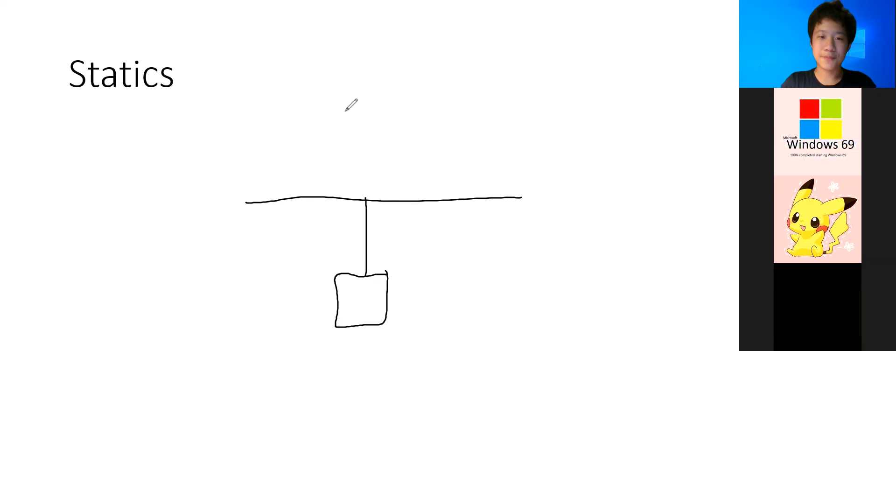Since the definition of this is so simple, and it seems like we've done a lot of problems similar to this before, it's going to be pretty easy for you, I think, and we're just going to go more in depth about it. Okay, so statics is basically the physics behind anything that's not moving, stable.

And in statics we have something called static equilibrium. Static equilibrium is basically a fancier word to describe an object at rest. So if an object isn't moving, we would say that this object is in static equilibrium. Things that are in static equilibrium are things that aren't moving.

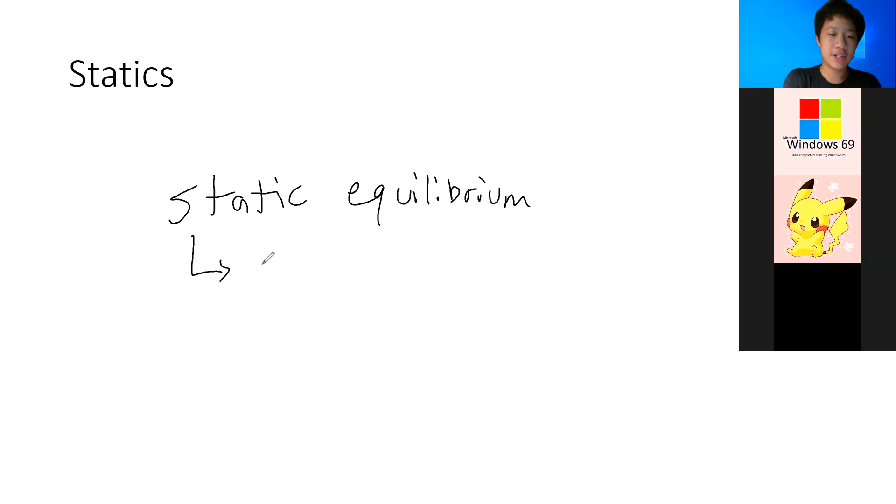So what qualifies something as being in static equilibrium? There are actually two qualifications that are needed. The first qualification is no net force acting on the object. And the second qualification is no net torque.

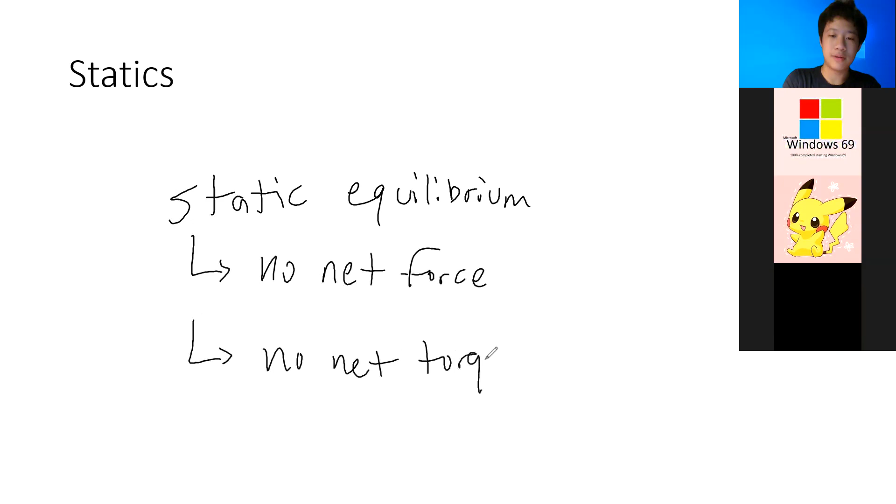Okay, so these are pretty intuitive, right? If there was a net force on the object, then it would start to move and flip over, and it wouldn't be in static equilibrium anymore. That's why there cannot be any net force. Also there can't be any net torque on the object, because then the object would start spinning or rotating, and then it wouldn't be in static equilibrium either.

So these are the two things we need for static equilibrium: first, no net force is allowed, and no net torque is allowed.

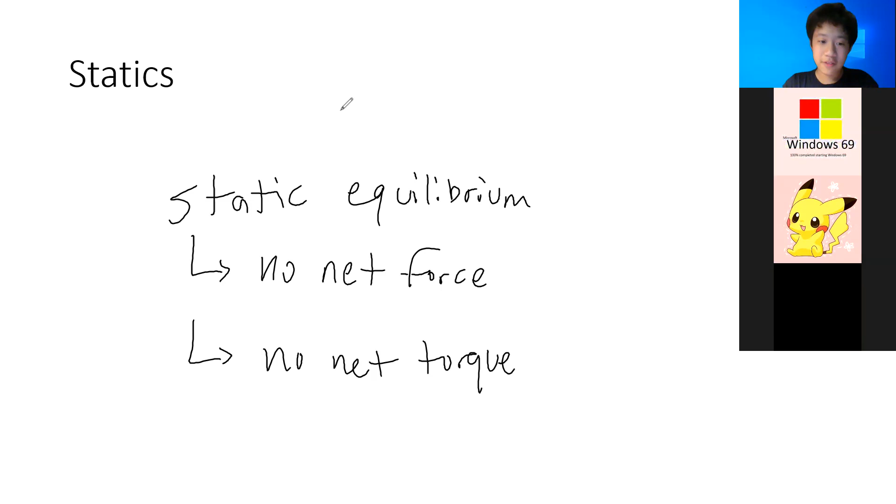So the basic problem-solving procedure you would use for solving things in static equilibrium is this: first you can look at no net force. What kind of equation can you make out of no net force? Well, F equals ma.

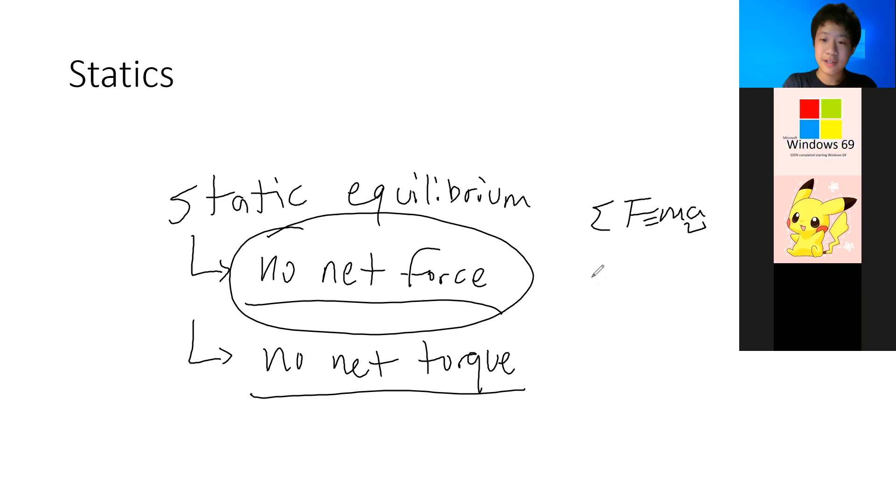And if the thing is in static equilibrium, then A must be 0. So the sum of all the forces on the object must equal 0: 0 equals force 1 plus force 2, etc. That's one equation you can get from the definition of static equilibrium — all the forces must balance out somehow. And similarly for no net torque, 0 must equal torque 1 plus torque 2 plus torque 3.

Now you've basically got two equations you can use for static equilibrium. Once you have these two equations, you can then solve for what you need.

And one extra thing to note about torque is that when we analyze torques on an object at rest, let me give you an example of a ladder resting against a wall — we're going to see a problem like this later on.

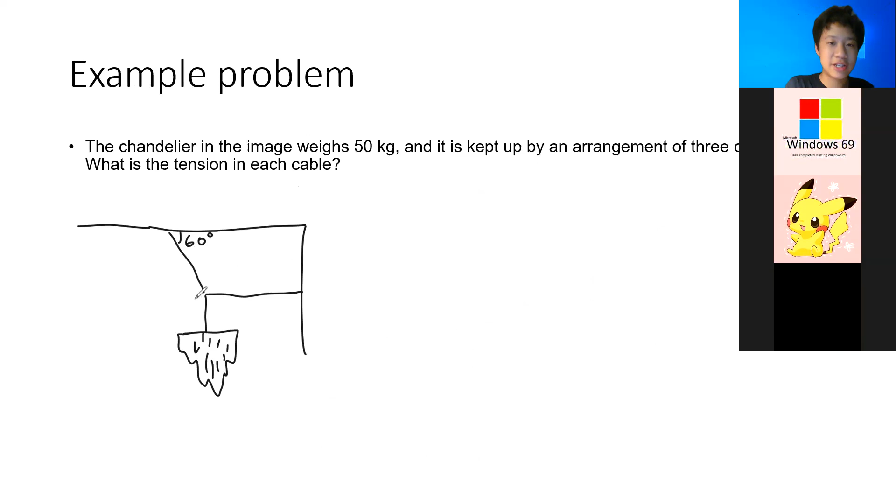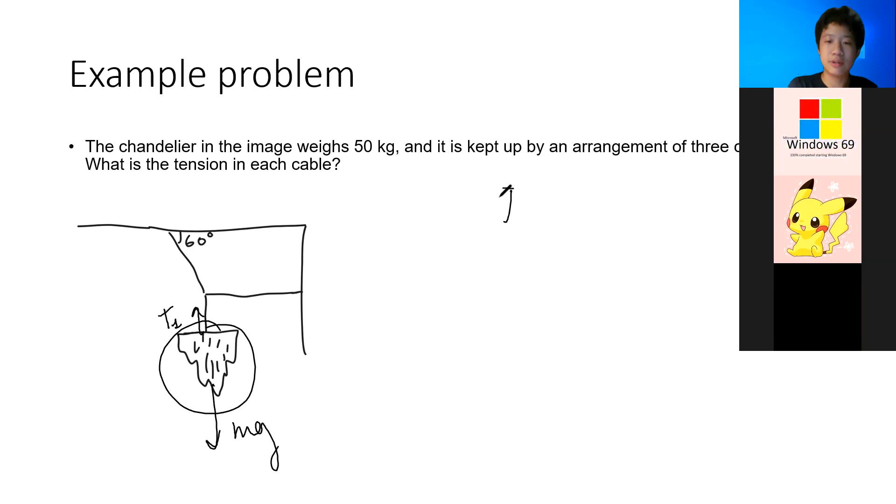Well, first of all, the easiest thing to do is look at the chandelier - there's mg pulling it down, and let's say this is T1. The only thing that's supporting the chandelier is that rope, so T1 must equal mg. That's pretty easy. And then how do we figure out the tension here and here? They're not connected to the chandelier. So how do we figure that out?

Well, let's analyze the point here where all 3 of the strings meet together. Let's look at this point right here, let me draw it out. So we have one tension going this way, let's say this is T2. We have T3. And as we know, tensions go towards the center of the string, so tension in the first string goes like that, together. So we do have T1 pulling down right here.

So now we have this diagram of the specific point where all 3 cables meet. And if the whole thing is in static equilibrium, this point must also be in static equilibrium, so all these tensions must balance out. So what I would do is divide up the tensions into their own components, because we can't really do analysis if T2 is at an angle.

So basically, we're going to divide T2 into its components. So this way it's going to be T2 cosine 60, and this way T2 sine of 60. See this triangle right here - that's how I got it.

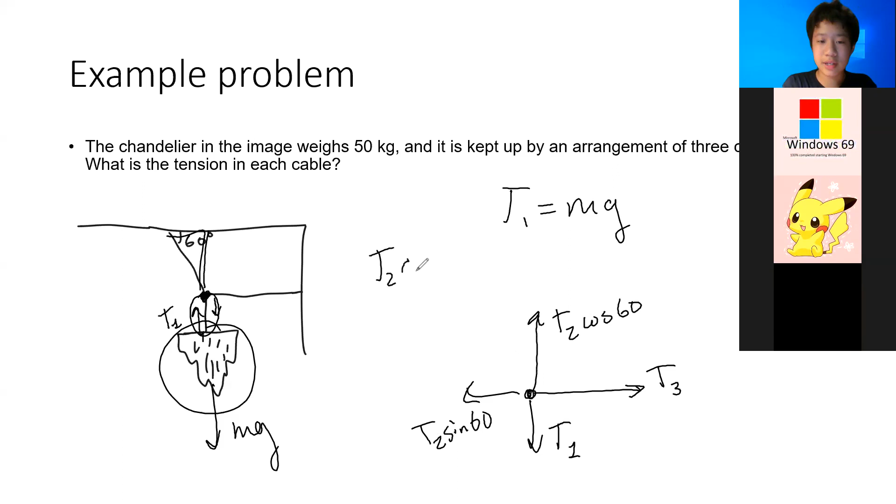So now that we've divided T2 into its components, now we do the force analysis. All the forces in the y direction have to balance out, they all have to sum to 0. So T2 cosine 60 minus T1 equals 0, because these forces have to balance out. Otherwise, the object would not be in static equilibrium.

Similarly, for the horizontal direction, we have these 2 forces. So T2 sine of 60 minus T3 equals 0 as well. Now we've got 3 equations and 3 unknowns: T2, T1, and T3. Now we can solve for what we need.

Okay, so now let me get rid of this and we'll solve these problems. First of all, we know T1 is mg, we could already find that. And if we substitute T1 in as mg right here, then we get T2 cosine 60 equals mg. T2 equals mg over cosine 60. So that's T2.

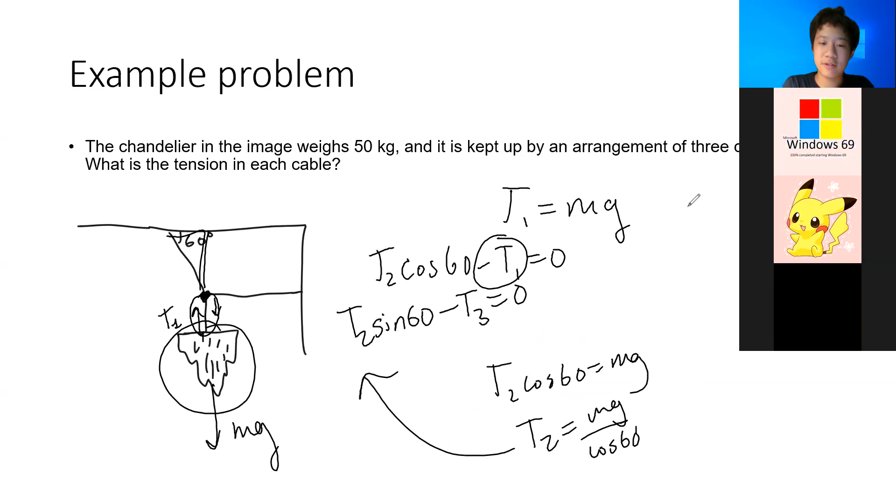Now we know what T2 is, we can plug it in here. So mg sine 60 over cosine 60 minus T3 equals 0. So T3 equals mg tangent 60 - if you do sine 60 over cosine 60, that's the tangent of 60. So if you plug values in here, you get your answer.

That's how you do a statics problem - not that complicated. You may ask why I only used force here and didn't write any torque. Sometimes you don't need to do both torque and force, you don't need to make both equations. Sometimes if you just analyze the force, it gives you your answer right off the bat, and then you don't need any more calculations.

So you can just go with it. But sometimes just doing a force analysis won't give you all the answers you need - maybe you'll have 2 variables and only 1 equation. Then you'd have to make an extra equation using torque. Most of the time you really only need to do either a calculation in force or a calculation in torque, depending on which one you choose.

Are there any questions? In which cases will you need to use both?

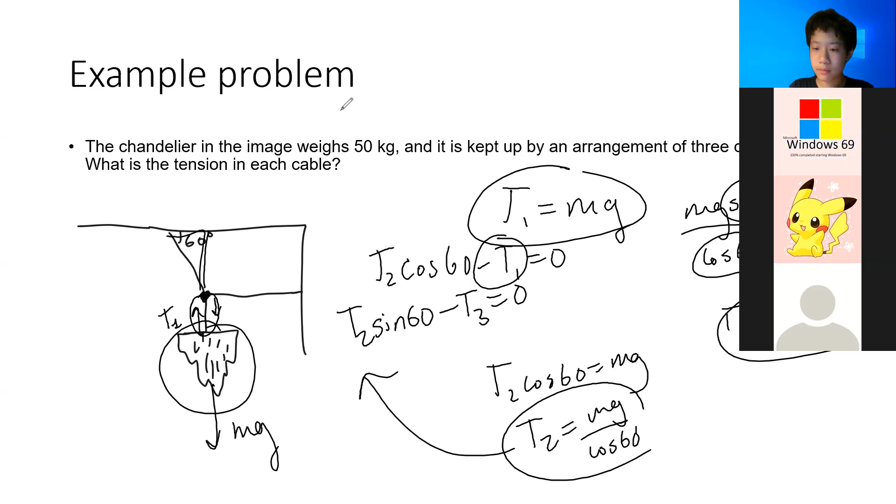Sometimes when you just do force analysis, you get an equation like T1 plus T2 equals 60 or something like that - that's all you get. In a theoretical question you'd just have this equation, but you still don't know what T1 and T2 are individually. So you'd use torque to make an additional equation to solve for each of those things. Basically, sometimes you only need one equation, but when you don't have enough information from force alone, you'll need to analyze torque along with it to get more information.

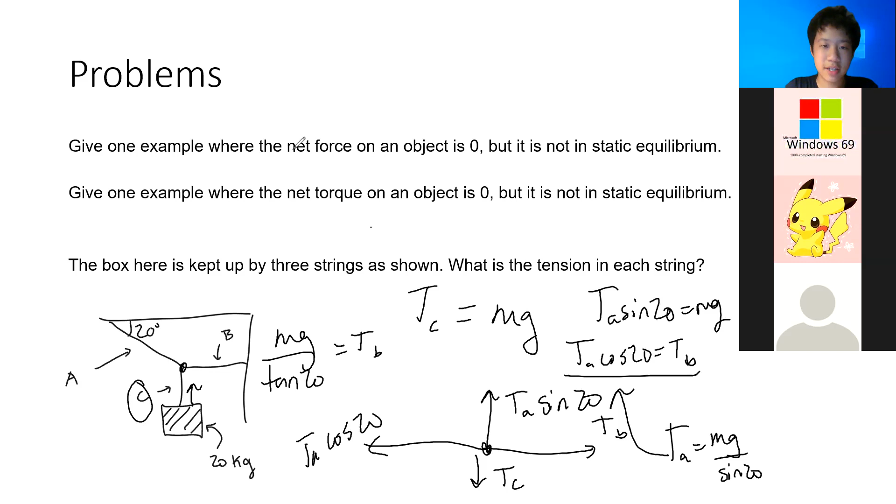Okay, does everyone understand this? So I'm not going to evaluate what this exactly is, but I hope you guys get the idea. All right.

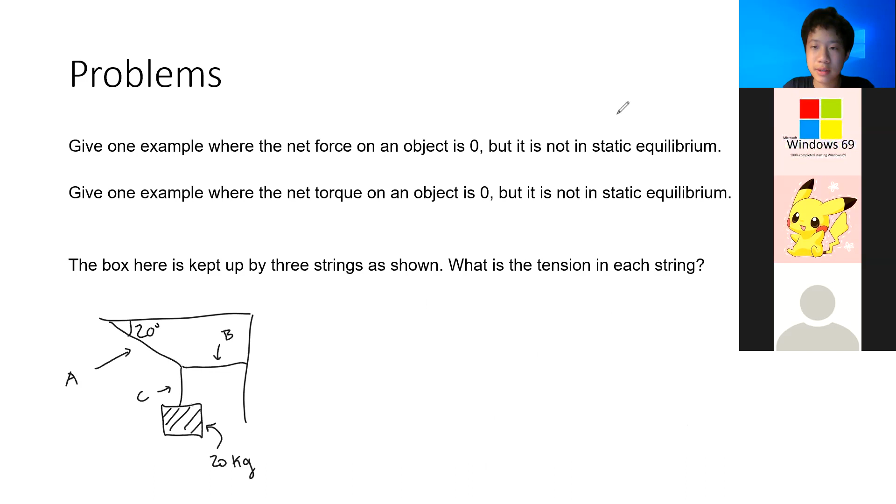So now we have a different problem with static equilibrium. Shouldn't be too hard, so I'll give you 2 minutes for this one. And when you get your answer, please chat that to me.

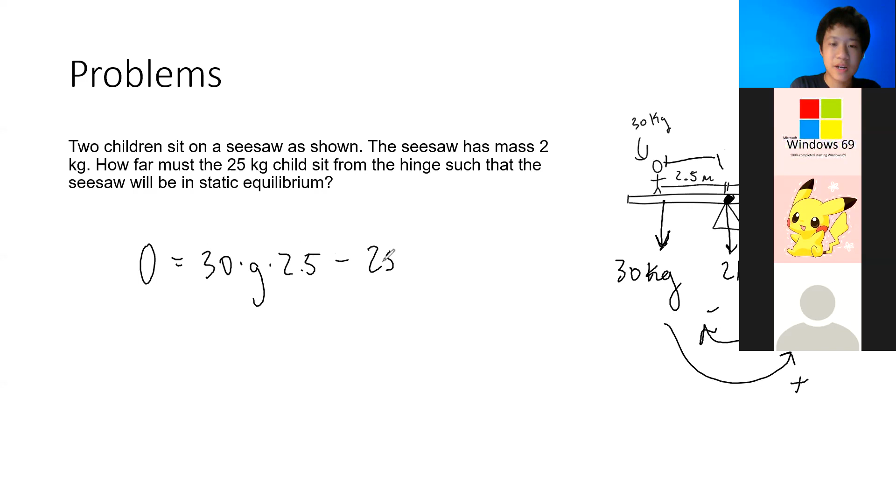Okay, so the net torque must equal 0. 0 equals — let's do torques in this direction as positive, torques in this direction as negative. So then we got 30 times G times R. This is 2.5. And then, 2.5, the 25 kilogram is in the other direction, minus 25 times G times X.

And then the 2 kilogram mass, the gravity force, it goes straight through the center, which means R equals 0. So there's no torque acting on the center based on the mass of the seesaw. Okay, so that's all the torque we have.

So now let's solve: 30G times 2.5 equals 25G times X. Cancel some G's, we'll get X equals 3 meters. All right. Are there any questions?

In what case would the mass of the seesaw matter instead of being canceled out as it is now? So the seesaw is perfectly balanced on the hinge. When you go to a seesaw, it's perfect — the middle of the seesaw is right on the hinge. If in some case you were to have a hinge here, but the seesaw is slightly displaced away from it, then the center of mass would be exerting the torque. Okay, so that's when you would consider the mass of the seesaw for your torque equation.

Okay, another problem here. So the thing with static problems is that you have to go through a lot of problems, and these are actually pretty common problems. These are basically the standard problems you're going to be tested on. So if you are familiar with doing each of them, then they'll be pretty easy for you when you encounter them on a test or something.

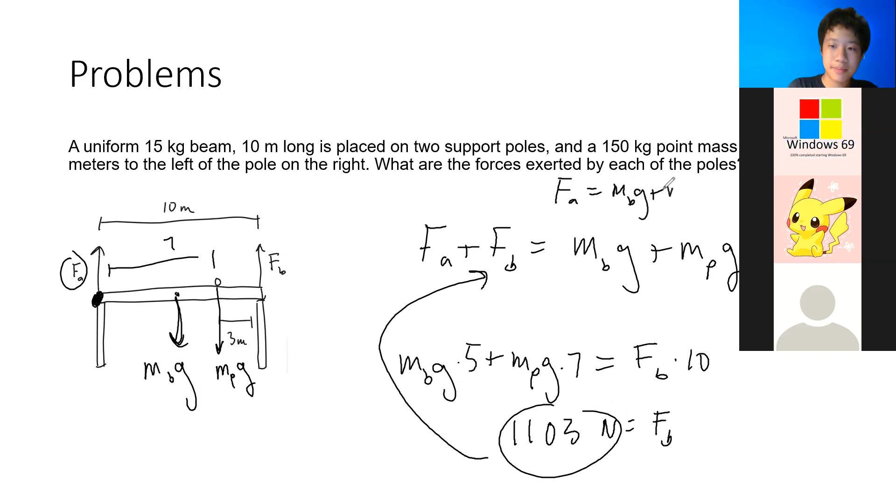Now I just plug this into this equation right here. So FA will just equal MBG plus MPG minus 1103. Let me just do that real quick... 514.

As we can see here, these answers do make sense because since the point mass is closer to FB, intuitively, FB needs to exert more force to keep that point mass up rather than FA. Any questions?

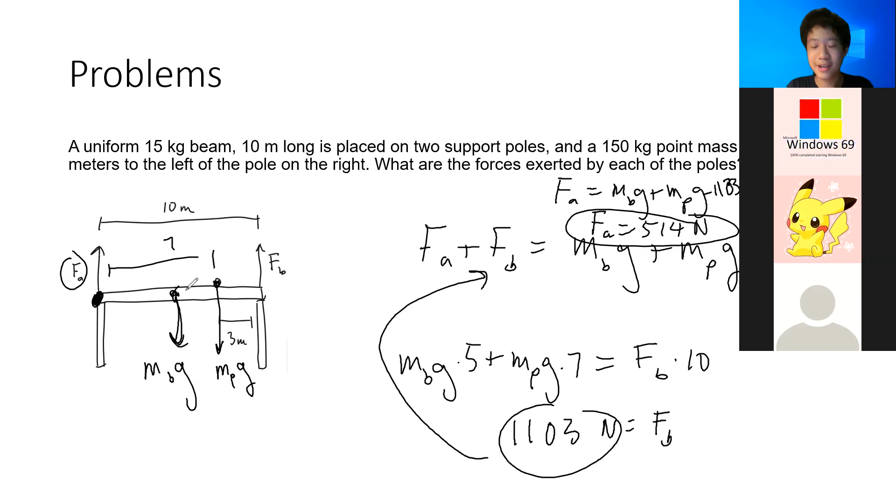So this is one of those examples where we had to strategically choose which point we use to find torque, which made it a lot easier for us to solve our problem. If you chose your torque around any other point, you would have still gotten the right answer, but it just takes a lot more time. So you want to be as efficient as possible.

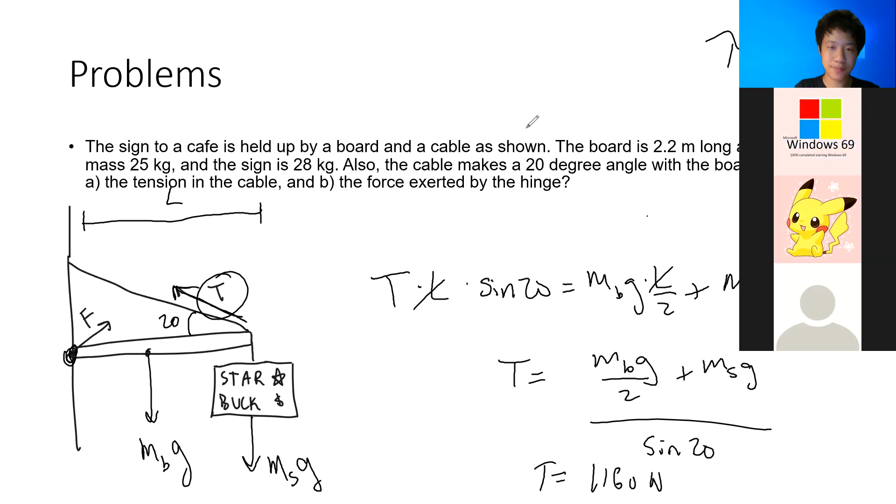So the hinge is going to exert a force which keeps the system in static equilibrium. Okay, so what is that force? Well, now we can make a force equation, right? Because obviously, if we choose torque around the pivot point, it's not going to do anything to help us solve for force. Okay, so we're going to do a force analysis.

So first of all, we've got to split everything into components, right? The force here needs to be split into components Fy, Fx. The tension also needs to be split into components: T sine 20, T cosine 20.

Okay, so let's first do forces in the x direction, horizontally. All the horizontal forces must balance out. If we look at the diagram, there are only two forces, Fx and T cosine 20. So this means that Fx equals T cosine 20, and we already have that. We just multiply this by the cosine of 20, and we're going to get 580.

Fy now. All the forces in the vertical direction must also balance out. So let's set this direction as positive, this as negative. So we're going to have Fy plus T sine 20 minus mbg minus msg equals 0. Fy will equal mbg plus msg minus T sine 20.

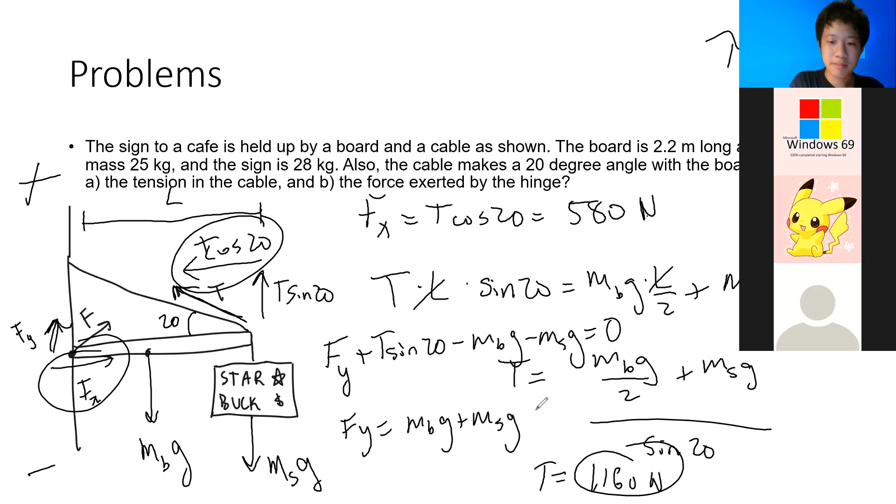Okay, we already have these values. We have this value as well. So Fy equals 122. Then you just use the Pythagorean theorem, right? This squared plus this squared, take the square root. The answer should be 593 newtons. All right, are there any questions?

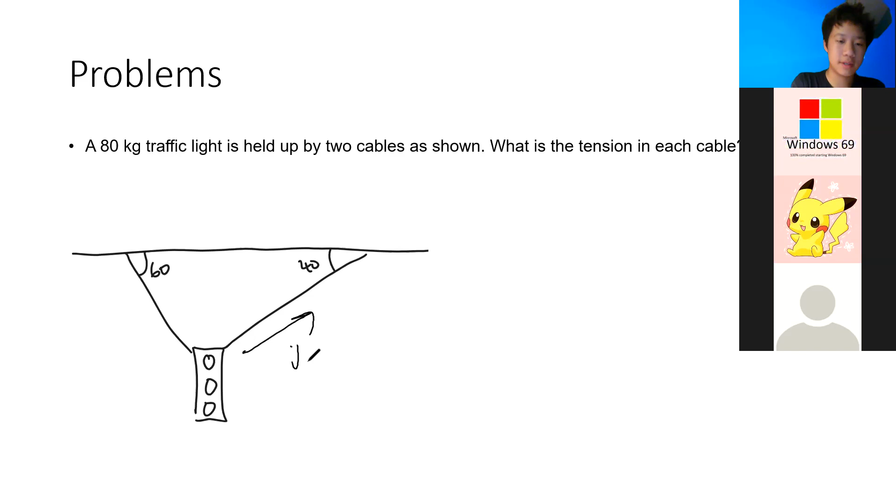Alrighty, I'm going to explain this one now. So for this problem, we have a traffic light held up by two cables. So what I'm going to do is just a force analysis, right? So we have, let's say this is T2, T1.

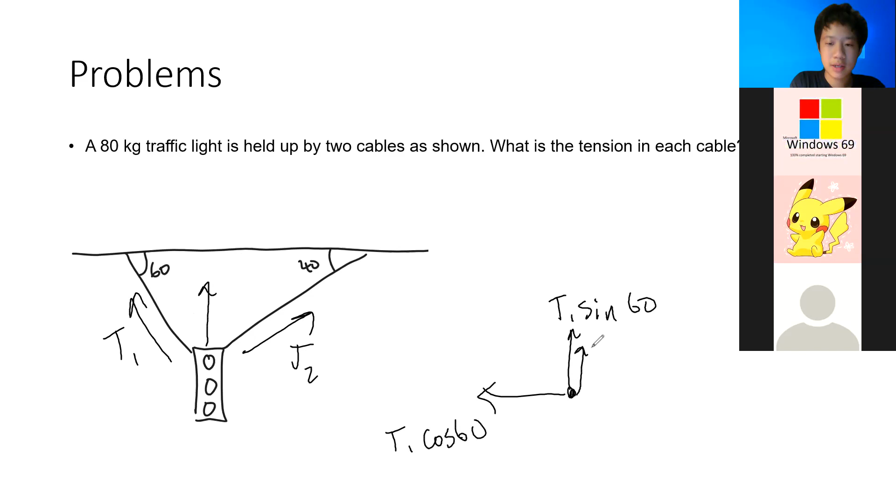So if we take the traffic light as a point mass, if we divide T1 into its components, we've got T1 sine of 60, T1 cosine 60, and then for T2, we've got T2 sine of 40, T2 cosine 40, and then we've got the mass of the traffic light, mg.

Okay, so the horizontal forces must balance out. This means that T1 cosine 60 equals T2 cosine 40. Vertical forces also balance out, which means T1 sine of 60 plus T2 sine 40 equals mg.

Okay, two equations, two unknowns. You can solve this system for T1 and T2. So in the end, you should get T1 equals 610, T2 equals 396. Okay, any questions?

How do we know that the horizontal ones aren't going in the same direction? How do we know they're in opposite directions? Well, if they're in the same direction, then how would the system ever be in static equilibrium, right? If the forces were in the same direction, then in the horizontal direction, the traffic light would be accelerating to the right. So that's obviously not going to be possible.

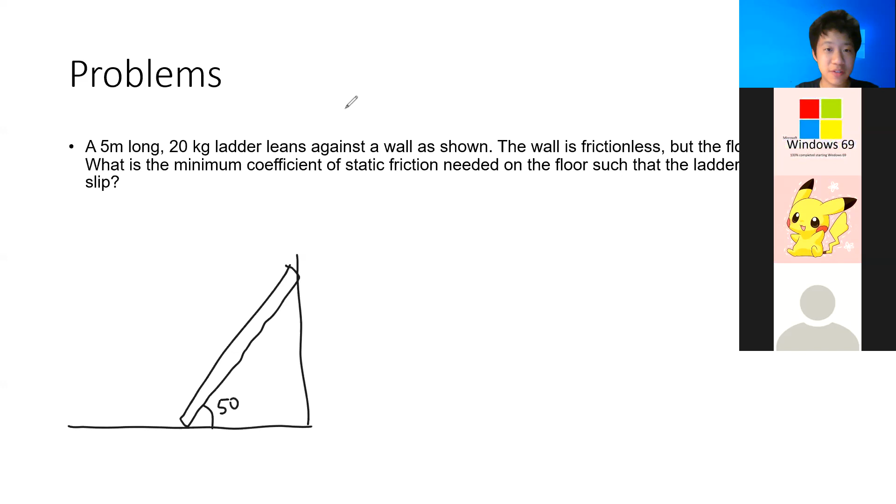Okay, so I'm going to explain this one now. We have a ladder leaning against a wall. The wall is frictionless, but the floor is not. So you want to find the minimum coefficient of static friction such that the ladder does not slip. All right, so if the static friction was not high enough, like if it was ice or something, then the ladder would obviously slip down.

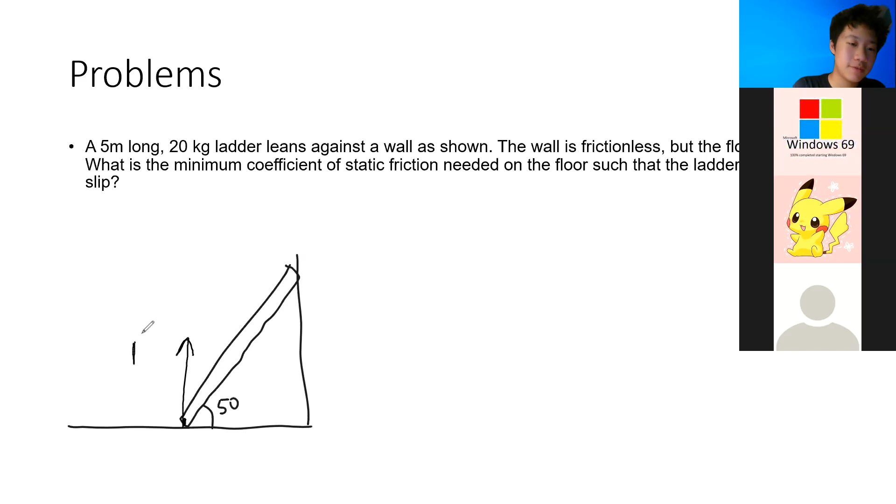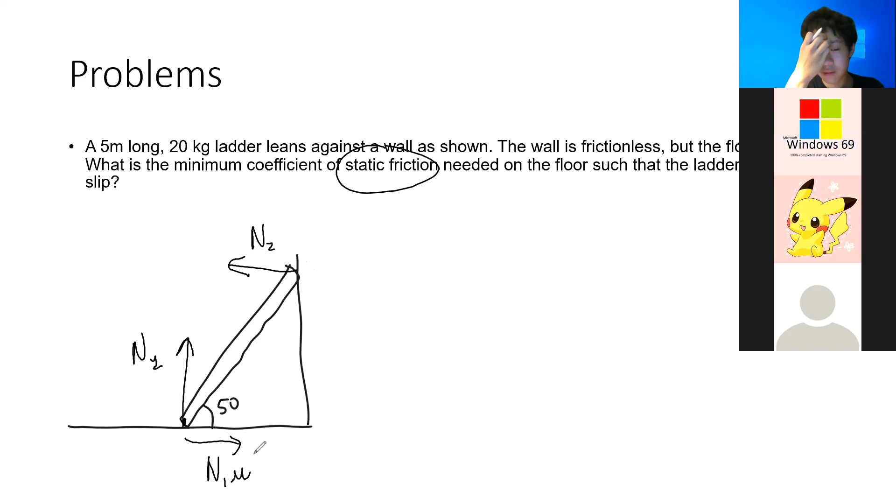Okay, so let's analyze the forces, right? To start every kind of problem, we're going to have to do a force diagram. So we've got normal force exerting up from the ground. Then we've got normal force from the wall, in this direction, N2. Okay, so then we've got the friction, the static frictional force. It's going in this direction because it wants to prevent the ladder from slipping out. So this is going to equal N1 mu. All right, then we've got mg going through the center, and it goes straight down.

Okay, so that seems like we've got all our forces now. So let's first do a force equation. All the forces must sum to 0. In the vertical direction, all the forces sum to 0, which means N1 equals mg. In the horizontal direction, all the forces must sum to 0: N1 mu equals N2.

Okay, so now let's do some torque. So as I said in the beginning of class, we want to strategically choose our pivot point so that we will make life easier for us, right? We want to be as lazy as possible when we solve our equations.

So for this problem, I'm going to choose a pivot point at the bottom of the ladder. Why do I choose it there? Well, if I choose it there, observe how 2 of the forces involved are going through that point, which means we don't even need to consider them in our torque equation, which means we only have 2 other forces we need to consider. If we had chosen the top instead, then we would have 1, 2, 3 variables in our torque equation. So we want to strategically eliminate as much math as we need to do in our equations.

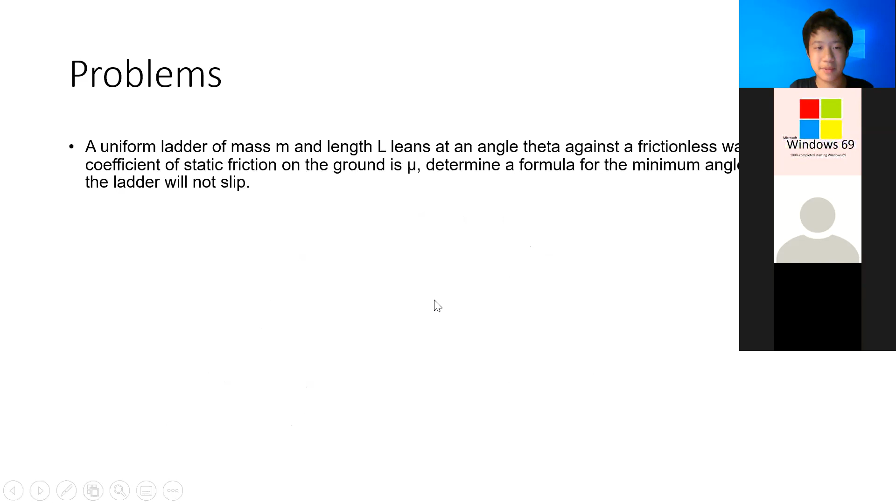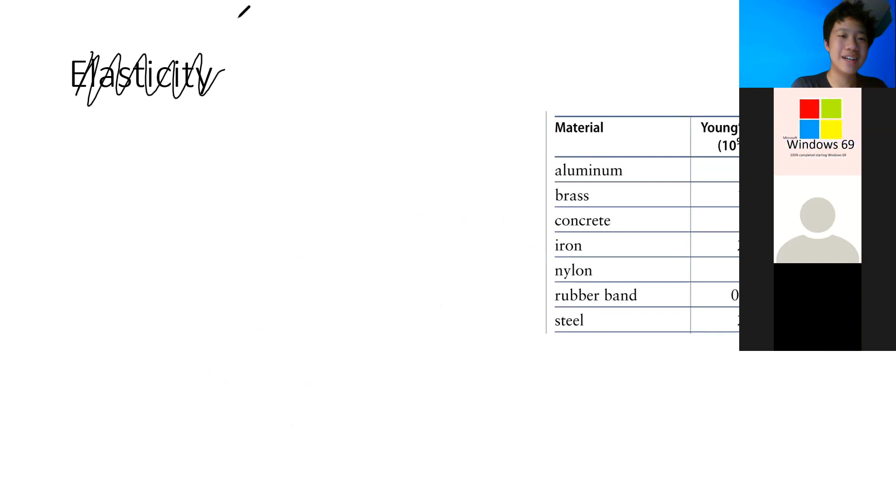So we've got elasticity now. Well, it seems like I forgot to add a slide for types of equilibrium. So let me first change this real quick to types of equilibrium. Add a slide on that.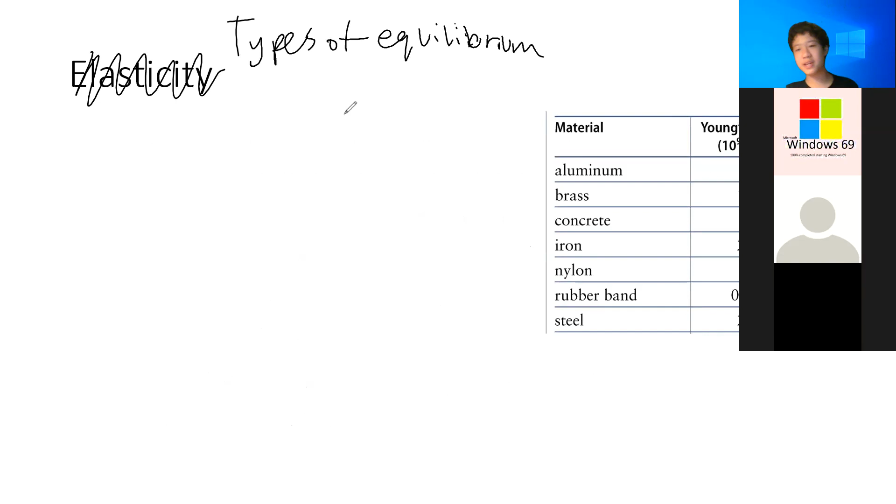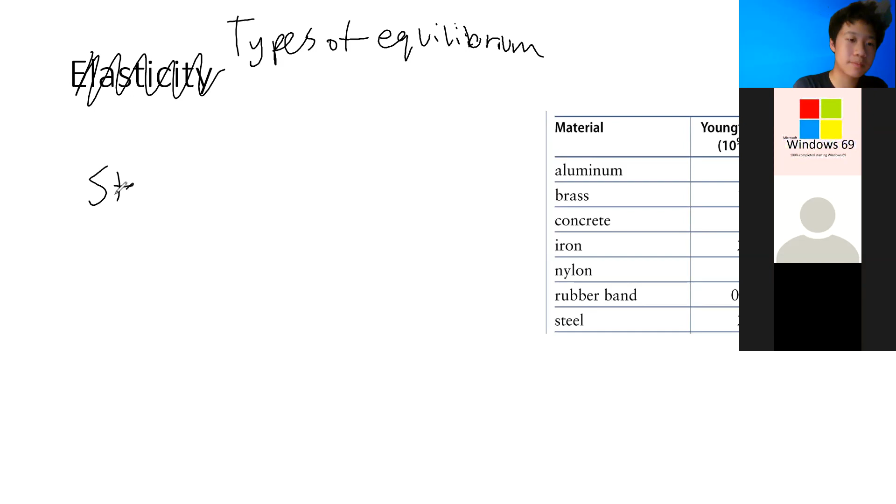Types of equilibrium. So we've got 2 main types of equilibrium, both types of static equilibrium. One of these is called stable equilibrium. Stable equilibrium is where if we displace the object from its point of static equilibrium, if we move it out, or apply any kind of force to it, after a while it's going to return to its original position.

One example is if we have a spring. If the spring is initially at rest, then it's in static equilibrium, right? If we apply a force downward, it will oscillate a little bit. It will get out of static equilibrium, but after a while, it will once again be in static equilibrium at the exact same point. So this is an example of stable equilibrium, all right?

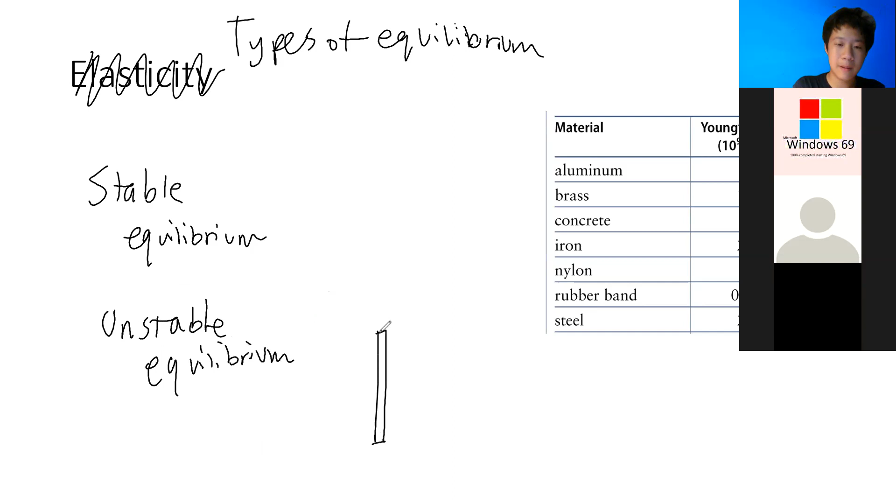The other type of equilibrium is unstable. Wow, what a surprise - unstable equilibrium. This is where the object doesn't return to its original state. One example is if we were to balance a pencil on a table and apply a small force to knock it over, it would topple over and not become upright again. So that's an example of unstable equilibrium. Stable equilibrium returns to original.

And unstable is not return. It falls over and then that's it. All right, so those are the two types of equilibrium. Normally you're not going to really need to do any math about this.

You're just going to have to identify whether a situation is stable or unstable equilibrium. Okay, so now let's move on to elasticity. This is not really related to static equilibrium. So elasticity is basically, for this part, we're going to analyze the effect that forces have on the composition of an object. So when we see the word elasticity, we think of springs and rubber bands, right? A spring is elastic. It can stretch if we apply a force downward. It can compress if we apply the force upward.

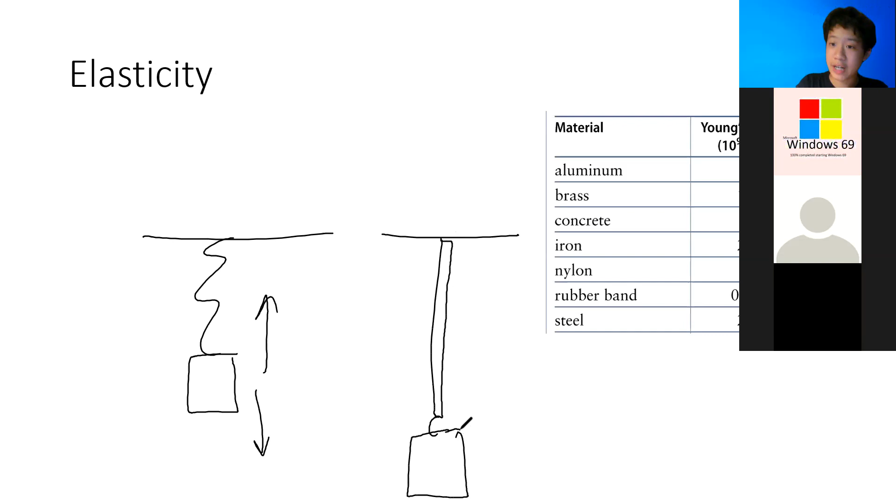So the thing is, any object in the universe also has a certain degree of elasticity. This means that anything, even your pencil, it can stretch and compress based on what forces are applied to it, even though it's just a tiny, tiny bit. So one example is if we have a rod hanging from the ceiling and then we hang a box to it, a very heavy box, the rod will stretch a tiny, tiny bit. We'll call that delta L, change in length.

So all objects have a certain degree of elasticity. They can stretch. So how do we find the specific change in length? Well, that's given by the formula: change in length equals force times L0 over E times A. Right now you don't know all the variables in here yet, so I'm going to explain it.

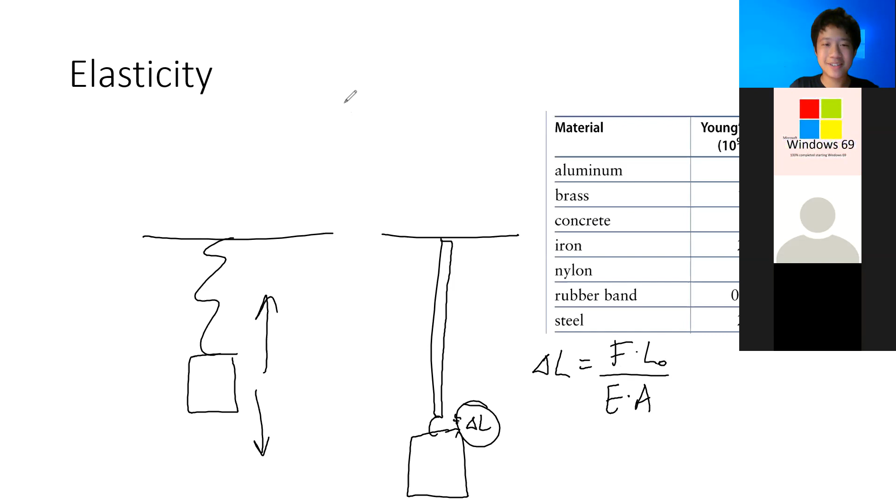So delta L is the change in length - this is how much the length is going to change. The force here is the tension force in the rod. So if the rod needs to exert a tension force upward that counteracts mg, this is the force you're going to use in the equation. The greater the force, the more it's going to stretch, right?

And then we've got L0, which is the original length of the rod, unstretched - its original position if there's no stretching or compressing going on. And then we've got E. What is E? You may notice that I've got a table here. This is a table of something called the Young's modulus, and the Young's modulus is E. Young's modulus is what we put in as E.

And the Young's modulus is basically a measure of how stretchy an object is. As you can see, a rubber band has a very low Young's modulus, but steel has a very high Young's modulus. So what does this mean? The higher the Young's modulus is, the less stretchy an object is, right? Because steel - have you ever seen a steel rod stretching? No, right? So the smaller the Young's modulus, the more elastic it is. The bigger the Young's modulus, the less elastic it is.

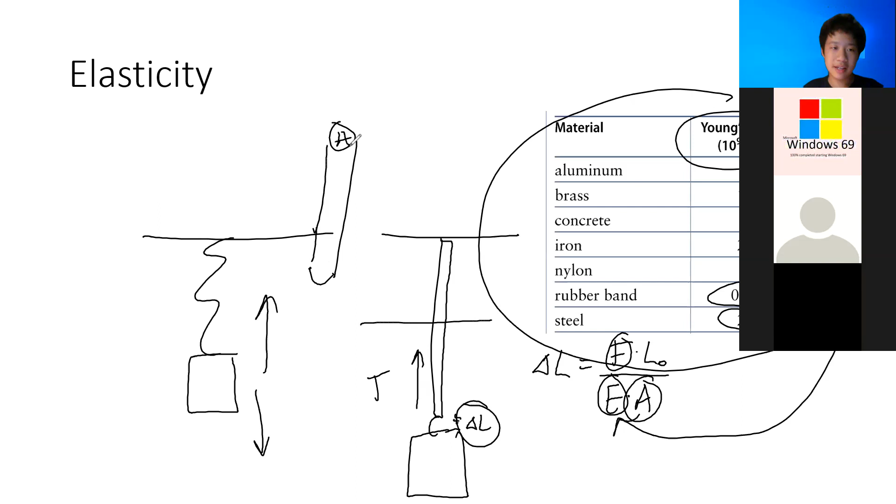So this is basically the equation that we use to find the change in length of an object due to forces acting on it. And this equation works for both stretching and compressing. For compressing, it's just that the force is in a different direction, and so is the change in length. It's going to get shorter, it's going to shrink down. So this works for both compressing and stretching.

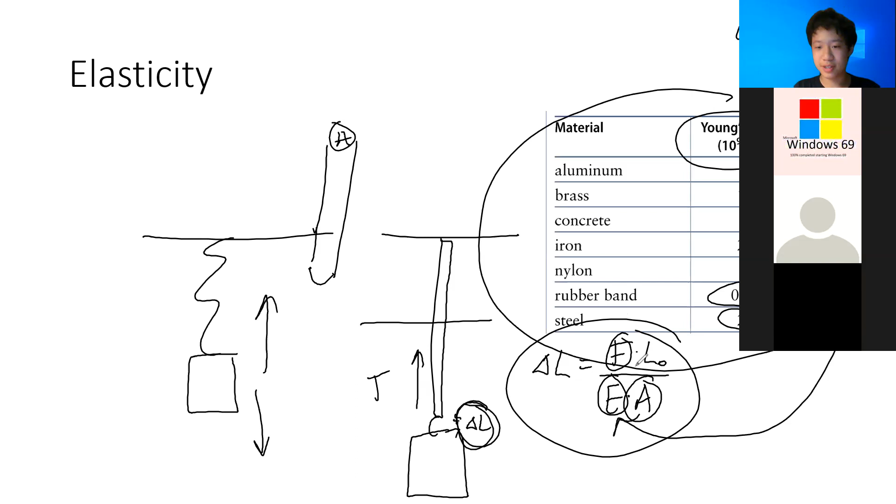Okay, so the Young's modulus is the same for stretching and compressing. It varies a little bit, but they're generally the same. So you can use the same Young's modulus for stretching and compressing. And one way I would memorize the formula here is you can see how the letters in the formula make the word flea - that's kind of like a way I would remember this formula. Just remember that there's a division sign here. Are there any questions?

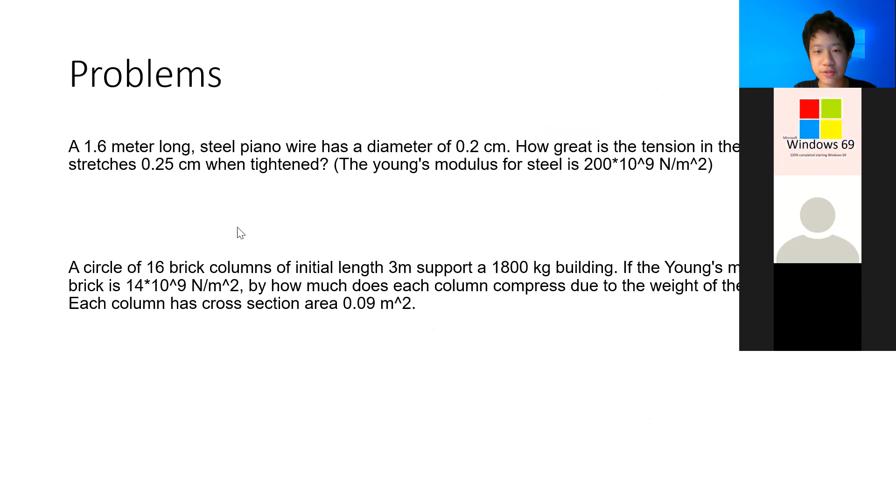Cool, 2 problems. These should be pretty straightforward. Actually, let's skip the bottom question - it's basically the same thing. So just do the first one. Should take around 1 minute, actually. So get your answer, please chat that to me. I'll let you know if you're right or not.

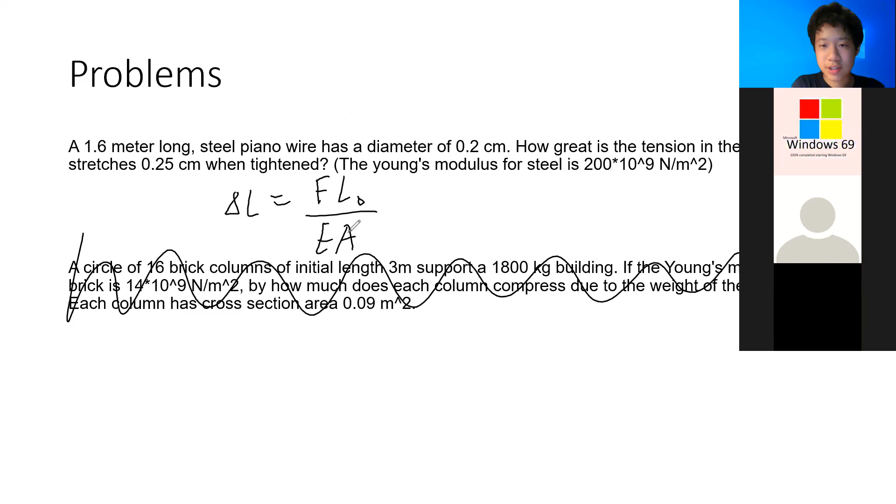All right, I'll explain this one now. The formula is change in length equals FL0 over EA. In this question, we want to find tension, which is F, so let's rearrange it a little bit.

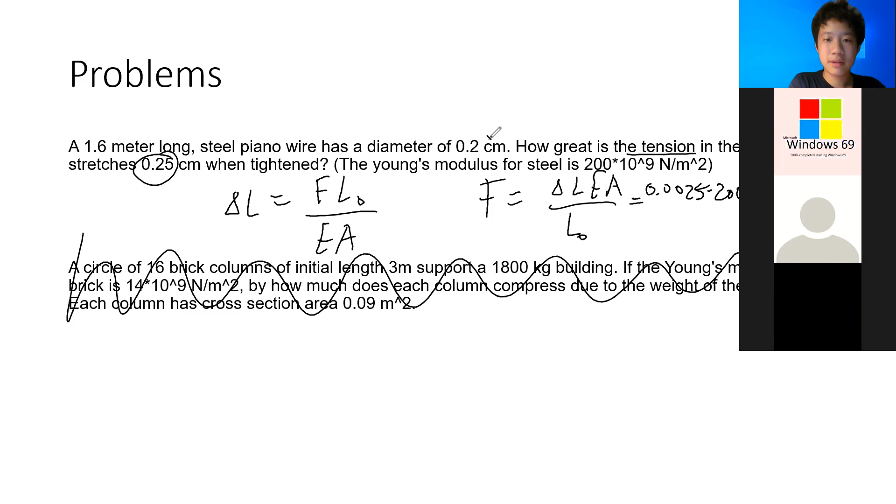We get F equals delta L times EA over L0. We know delta L is 0.25 centimeters, which is 0.0025 meters. E is given as 200 times 10 to the 9th. A, the cross-sectional area, we use basic geometry to find the area of the circle, since it's a wire, so it's pi times r squared. Divide all of that by L0, which is 1.6. If you evaluate all of that, you get F equals 982 newtons.

I forgot to tell you guys this earlier, but you don't need to memorize the Young's moduli for each object, because that's just a waste of time. Whenever you have a problem with elasticity like this one, it's often going to give you the value, and you just use that. You don't have to memorize the Young's modulus at all.

So let's go on. Now we've got fracture. Just like with elasticity, any object can fracture. What does fracture mean? Fracture is basically a fancy word for breaking. Any object breaks, right? If you snap a twig in half, or even steel, if you stretch a piano wire too far, it will snap in half. So when we talk about fracture, we're going to talk about how forces break objects.

Forces can break objects in 2 ways. One is by stretching them, which is basically tension, or tensile - tensile means tension or stretching. That's one way to break objects, by stretching them in half. Then we've got compressive. If we compress an object too much, it will kind of implode or something. So breaking can go both ways.

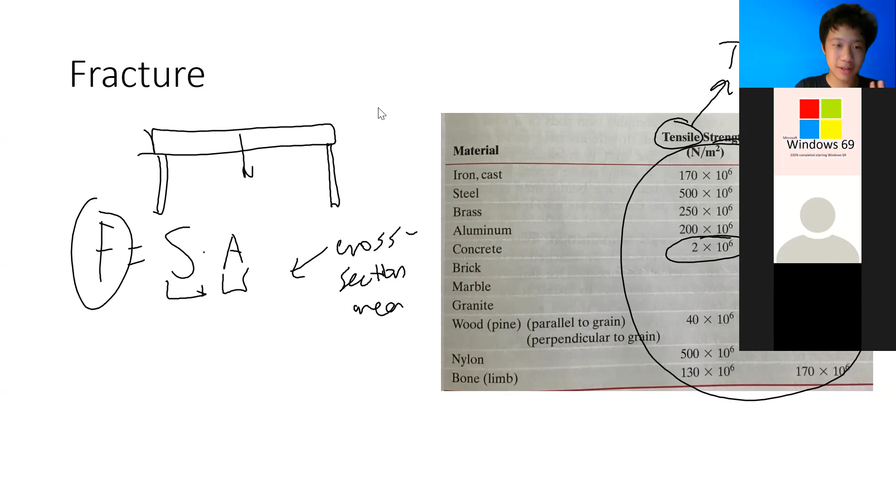But concrete is rarely used as support like a bridge. If you were to have a layer of concrete above two points as a bridge, the concrete would stretch when things go on it, and that's why you don't really see bridges made out of concrete. So the compressive and tensile strengths are different for an object, which means you'll have to use a different value for S depending on whether it's compressing or stretching. This is basically the formula for the maximum force an object can handle before it breaks. Any questions?

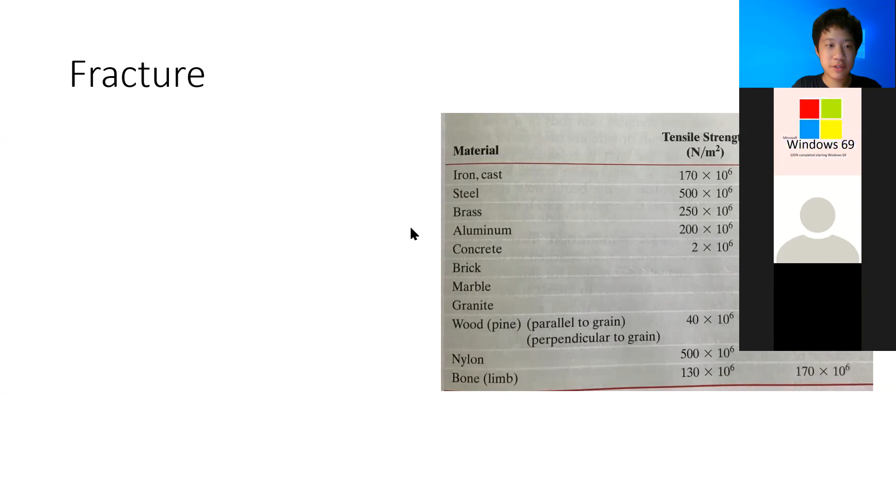Alrighty, we'll just do one more problem with this. Once again, I'm going to skip the bottom one, I'll include this in the homework. One minute for this one - it should be pretty easy.

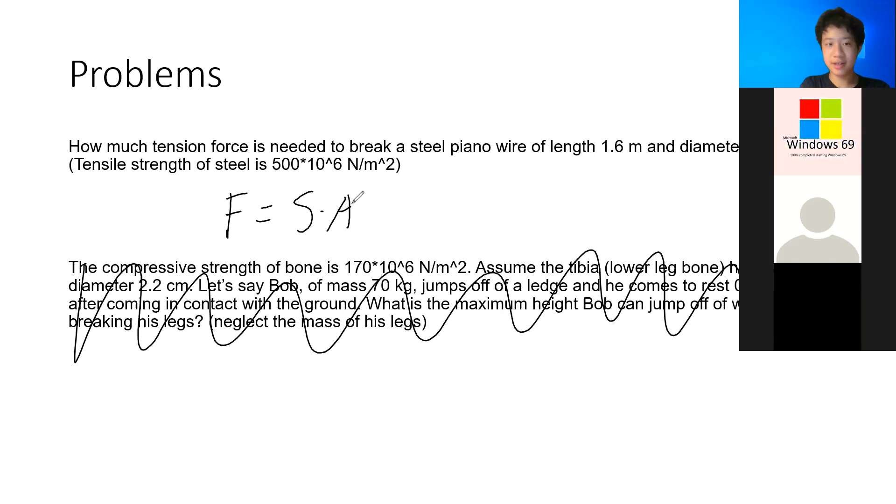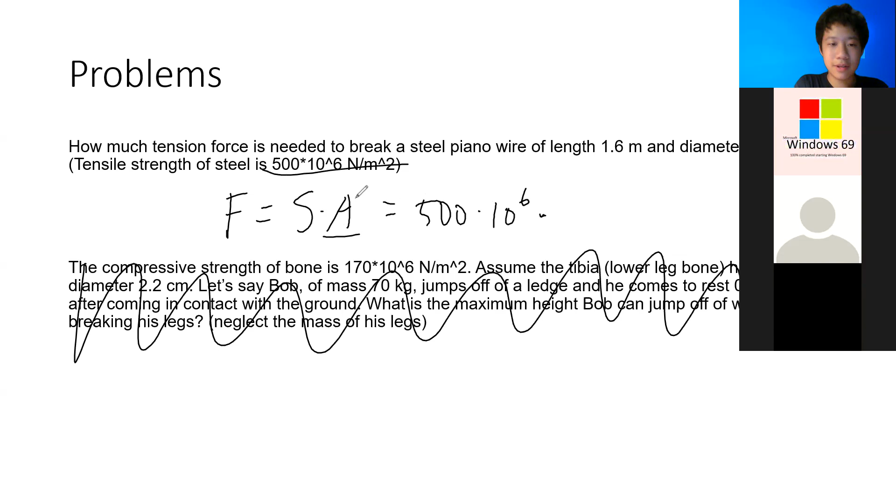All right, I'm going to explain this one now. The maximum force needed is given by the equation F equals S times A, where S is the strength, which is right here, and A is the cross-sectional area. So it's going to equal 500 times 10 to the 6th multiplied by the cross-sectional area, which is just a circle. Since the diameter is 0.2 centimeters, it's going to be 0.001 meters, so it's pi times 0.001 squared. If you evaluate all of this, you get 1570 newtons.

All right, so are there any questions?